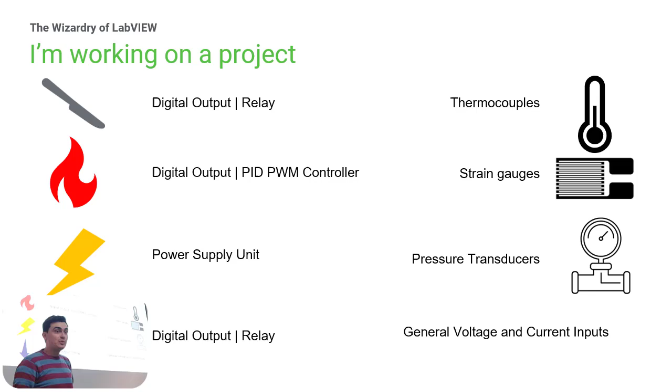But it's not just about blowing up this device under test. We also need to get some data to characterize what happens to that DUT. So I have a range of thermocouples, strain gauges, general DIO, AIO. And this is all very straightforward. Just the hardware for this. You can use everyone's favorite configuration editor. And because I'm quite experienced at all of this, I knew that this is going to work. And I guess this is the first marvel that I want to talk about when it comes to using the NI ecosystem and LabVIEW.

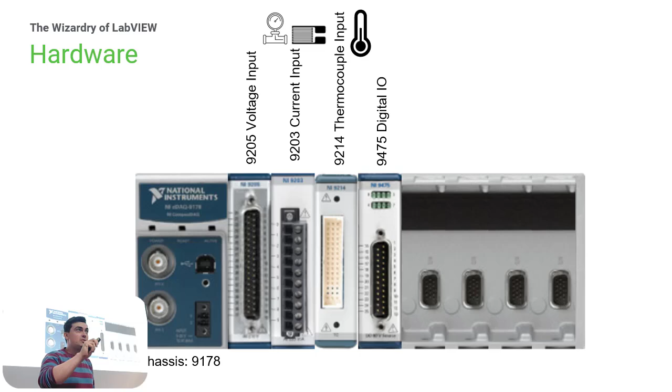I know that I can buy this equipment in the ballpark range of 3,000 to 5,000-ish. I think that's in dollars. And it's going to work out of the box. It's going to be more performant than I need it to be. This project will just run on Windows. But to go more specifically into this marvel, I'll talk about this DIO card. Probably the most basic card on there. It can either be on or off.

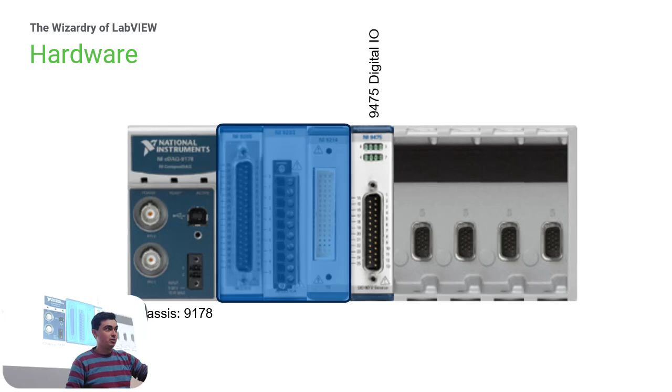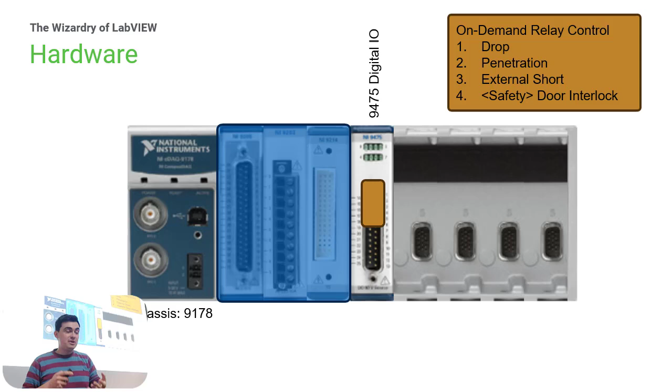But I need various I/O channels to drop the device, to penetrate a nail through the cell, do external shorts, surge, and I need other on-demand I/O for interlocks in the system. For temperature control, though, I also need to borrow a load of DIO for controlling heaters. I have 4 independent heaters on this DUT, and I need to be able to regulate the temperature around the DUT. DUT, device under test.

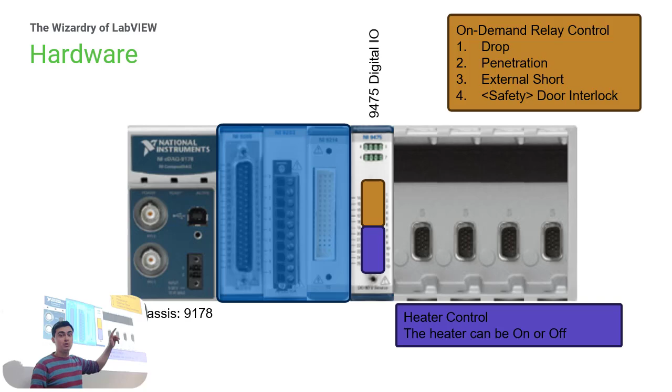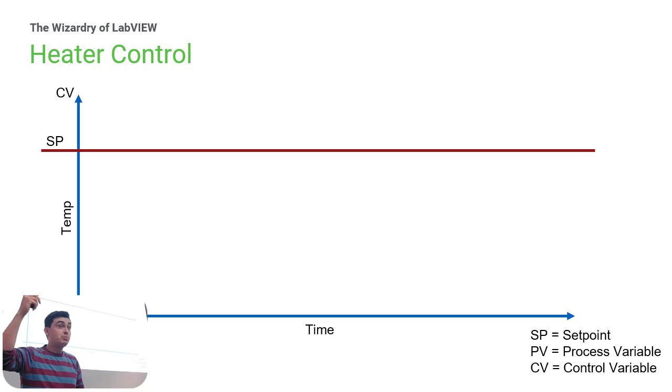That's fine, and this is our CV. What is CV? Control variable, out of the DIO. Now, that's all very well and good, but it doesn't look great, and when we're trying to characterize systems, we probably want more control than this. We want to make that tolerance as small as possible. And also, if you mess up your configuration for your tolerances,

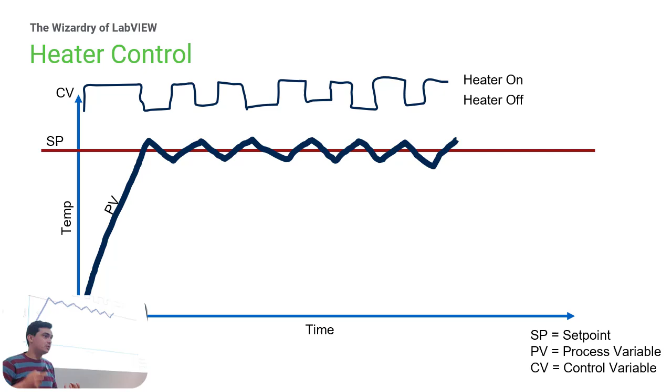what tends to happen with a bang-bang control circuit like this is you have massive overshoots. Even though you've told your heater to turn off, that heater is still very hot. So that heater is going to continue to increase the temperature of your DUT, and then the same thing happens in reverse. You told the heater to turn on here, but actually your DUT is getting cooler and cooler because of the ramp rate of warming up your heater, and basically your DUT is a heat sink. So we don't want that.

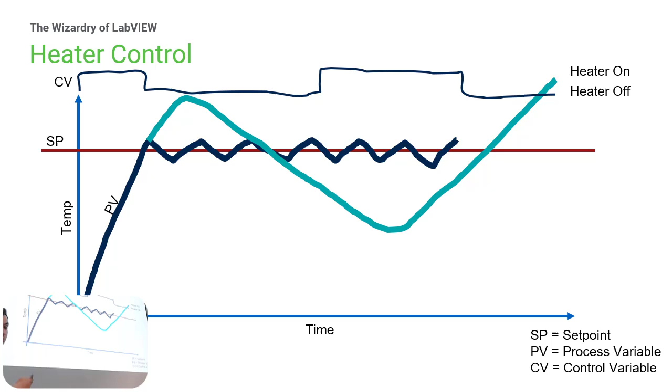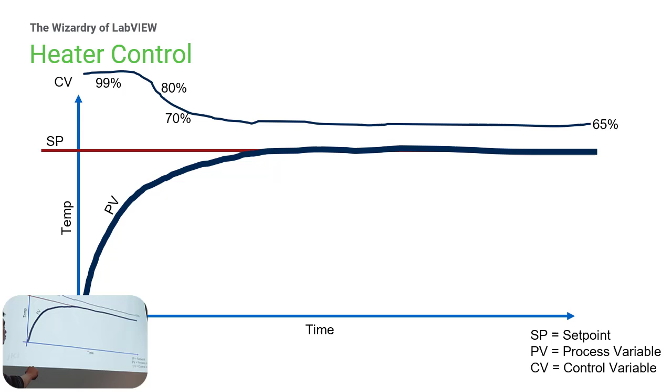Instead, we want something that looks like this, where we can start thinking about our heater not as an on-off, true-false heater, but something that we can control on an analog scale. I want this heater to be 75% on. And then by adjusting our control variable, we can create a nice curve on our process variable, the true temperature reading of our duct. And we're smart here.

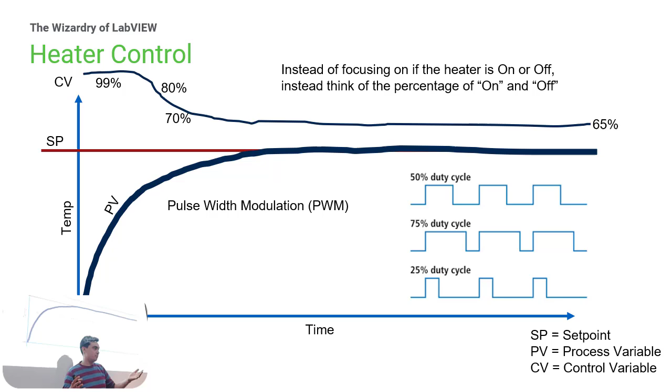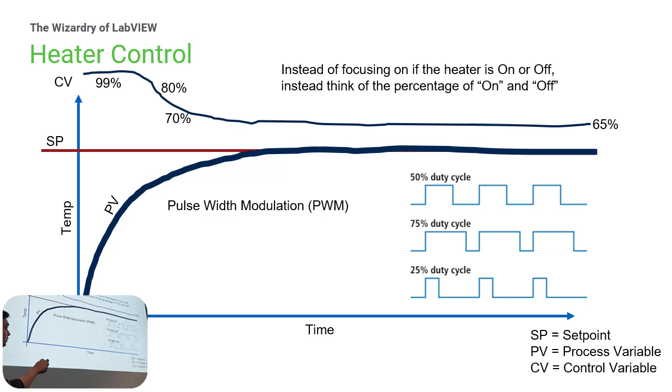You know that we're going with pulse width modulation for this, where we can play around with the duty cycle of the percentage of on time versus off time for our frequency. So all of this to say, I needed a way of implementing PWM with the hardware I already had. Now, when I got to this stage in the project, I was thinking, yeah, that's fine. This card, I'm sure it has counters. So I looked at the data sheet, nothing.

I saw that this card could go up to maybe 20 megahertz sample rate, but nothing about counters until I had to look at the data sheet of the chassis itself. And then I realised, bloody hell, there's 4 counters on the chassis, which I can then route through to the DIO. And if you're unfamiliar with what a counter is, it effectively lets us monitor frequencies, whether that's frequency generation or frequency monitoring.

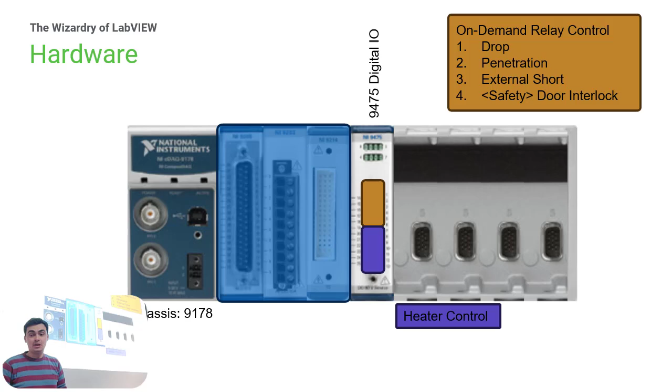So I read through the data sheet of the chassis, because typically I work with PXI backplanes, so I was unfamiliar with what a cDAQ chassis backplane had to offer. And I saw, right, it has 4 counters, and those 4 counters I can filter through to my DIO as if that DIO card had those counters inbuilt. The API was absolutely no different. And so yeah, this saved the day.

So I guess adding on to the previous hardware wonder of LabVIEW, this was a wonderful moment for me, realizing I've got myself out of a hole. And I could implement a really nice control system. Now, that control system in LabVIEW, in G, looks something like this. I can't show the actual customer code on here, but effectively we have a set point. This is going to be a user-defined or a test-defined parameter.

We have the process variable. This is a thermocouple reading near the heater. And then our control variable, this is controlling one of the counters I showed you on the chassis. And then we have our PID controller. Who here is familiar with PID controllers and closed-loop controllers in general? Okay, most of you are nodding.

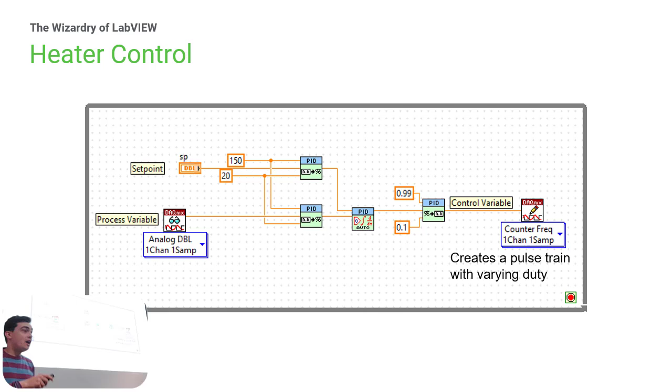And so the output here is going to be a number between 0 and 100, where 100% duty cycle would be on, and 0% would be off, 50% would be your standard square wave.

I'm using these functions here, here, and here to convert from real-life engineering units into a scale between 0 and 100. You don't have to have these here. You can enter into this function your ranges, but I prefer to scale everything to a percentage. It makes maths easier. So yeah, my mind works exactly like this.

G-code in general is a wonder in LabVIEW. It gives me the ability to think of a problem. Then I'm very dyslexic, so I will, in my mind, just whilst I'm having a coffee, just maybe close my eyes and think through the solution via a graph in my mind, exploring different avenues until I get this solution I'm pretty sure will work, but I find it difficult to explain that solution to other people.

And so I always end up just sketching it. In LabVIEW, you don't need to sketch it, you can just code it. And so this graph maps to how I think about problems.

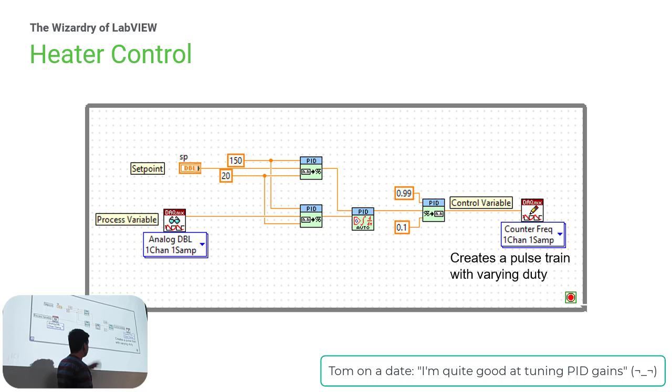Another great wonder. Now, humble brag, I'm quite good at tuning PID control systems, but out of the box in LabVIEW, I don't know if it's limited to LabVIEW Pro or LabVIEW Base, but the PID functions come with auto-tuning capabilities. So I will ship the system to a customer having tuned it, and I'm pretty confident in it.

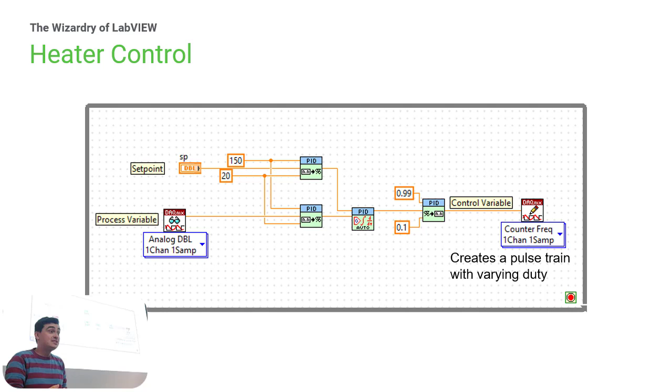But if they want to fine-tune it a bit more, you can enter a true Boolean into here, and then, hey presto, there's an auto-tuning wizard. And so I can ship that to the customer, basically no effort on my part, but it's improved their experience of my product. There are loads and loads of things in LabVIEW like this, which elevate your customer's experience. Another great wonder.

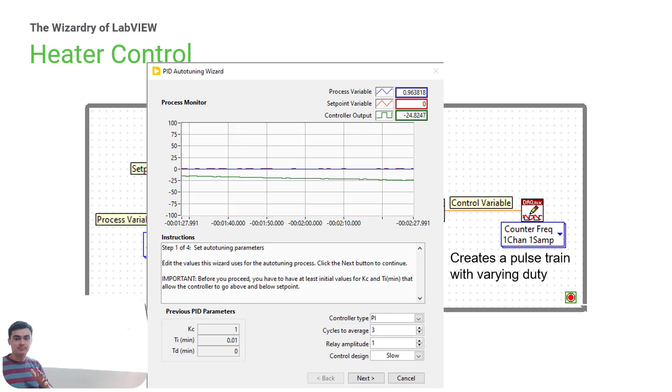Okay, so going back to this slide, we've talked about how the DIO is on-demand I/O. Then at the bottom here is going to be hardware timed. With the PWM signal I'm sending to the temperature control loop, that will be a standard 10 Hz signal, which I'm then adjusting the duty of. And because it's hardware timed, I know it's going to be pretty damn close to 10 Hz. It's not going to be controlled by Windows.

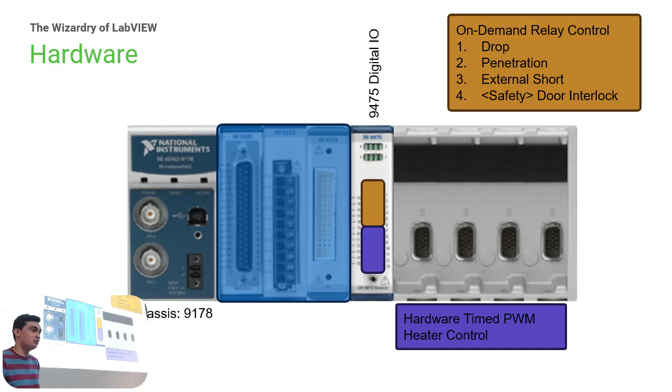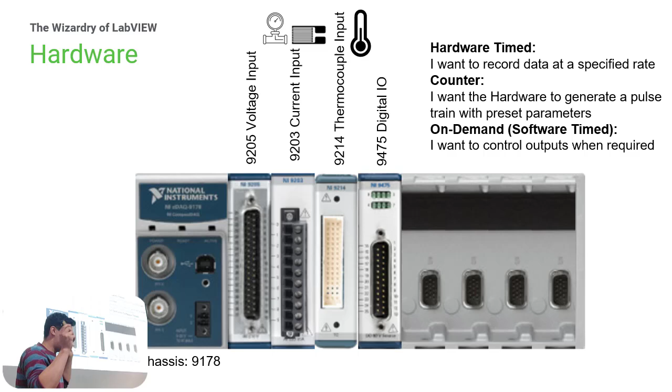What are we going to talk about? Yeah, so hardware timed, counter timed, and on demand or software. Now, everything that you see here can be controlled by exactly one API, DAQmx. Again, all feeding into how great it is to use NI hardware in LabVIEW. Basically these 10 or so functions will do all of your tasks.

Now, all of the code is going to basically look like this, except it isn't. Let me explain. All of the DAQmx code, you can create a channel, configure it, read or write, stop, clean up. And even if you don't have the hardware attached, you can simulate your hardware in MAX. So again, this is great.

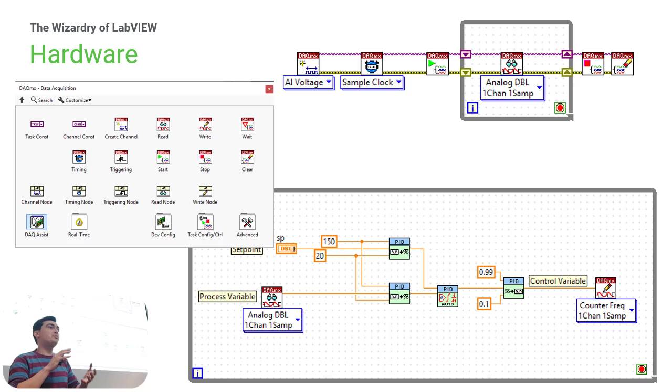Except for this particular project, I really wanted to be able to simulate devices to a higher degree than what MAX gives us. MAX being the Measurement and Automation Explorer, which allows you to configure the hardware. And so I basically took each of these functions and wrapped them into a special function which allowed me to swap the behavior depending on whether the hardware was connected or disconnected. And we call those special functions dynamic dispatch.

If you're familiar with object-oriented programming, great, you'll know what I'm talking about. If you're not familiar with it, it's a way of changing functionality based on conditions. Think of it as a fancy case structure. The way that object-oriented programming and dynamic dispatch is implemented in LabVIEW is another great wonder.

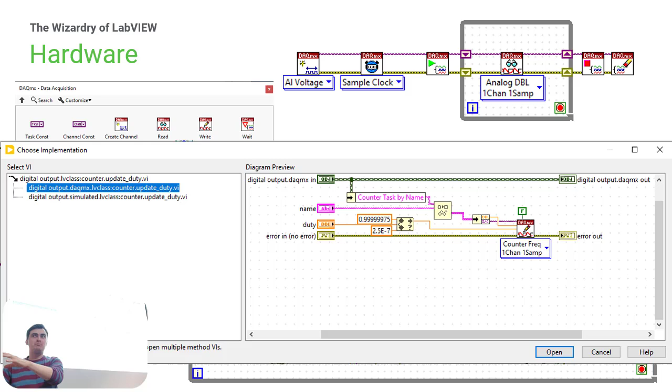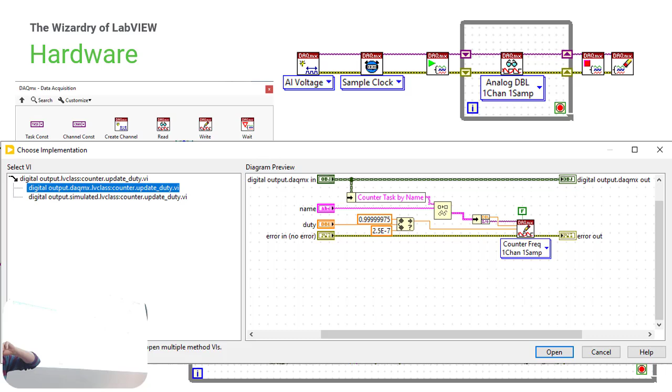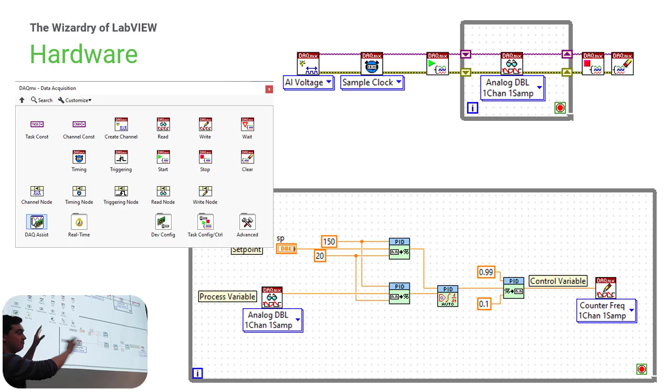But the way that this works, I think is really cool. You can double click on one of these functions and see the code in each implementation. Okay, enough OOP. I've lost most of you, so I'll move on. Yeah, so we have this generic code thing. Who can tell me, how do we do multi-threaded programming in LabVIEW?

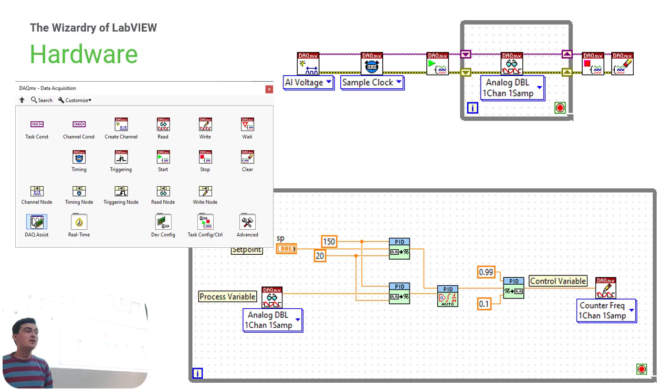Stick it on a block diagram, don't tie it together. Perfect. So I can copy and paste these. So I have 1, 2, 3, 4, 5, 6 loops on this block diagram. Great. I have 6 threads that are all going to execute. Do that in C++.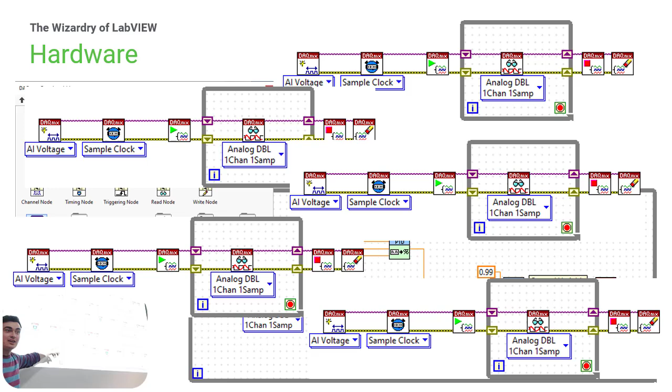You know, I know a bit of C++. I know enough Rust in order to implement this, but I can do this in 15 minutes. The time it would take me to implement it in another language would be colossal. The cost for the customer of buying a LabVIEW license, whether that's LabVIEW Plus, the full suite of NI hardware, well, my development time, to be frank, far outweighs the cost of the hardware and the licenses.

So if I was made to use free software and a free programming language and cheaper hardware, the customer would pay 10 times the amount of programming hours. So yeah, multi-threading in LabVIEW, amazing.

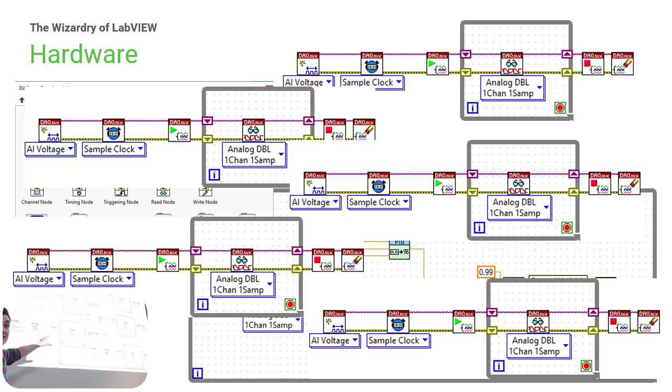Who here was at GDevCon, the last one? 1, 2, 3, okay. In my last GDevCon talk, I spoke about the LabVIEW compiler stack. I won't go into it here, but another wonder: programming in LabVIEW is super quick. I don't think LabVIEW gets the recognition it should. As a programming language, LabVIEW is fast. LabVIEW can have a seat at the same table as programming languages like Rust.

And it's down to the low-level virtual machine. It's in fact the same compiler technology that Rust uses. It's a different stack, don't get me wrong, but fundamentally the same technology. To put it in context, Python isn't in the same room as the table. Python is orders of magnitude slower. Okay, side note, that's great. LabVIEW's awesome. Next, NI VISA.

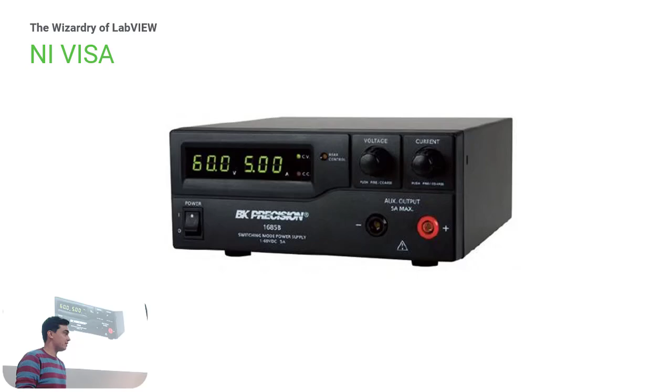One of my pieces of hardware, a PSU, that's not NI. This is the process I went through to learn, since it's not DAQmx, how do I program it? Well, I Googled it. I got the model number, the programming manual, there's a PDF. Let's scroll down, okay, so I need to send this function, I get this reply. All right, so from that datasheet, I took a screenshot of things like the baud rate, the serial setup stuff, and the message.

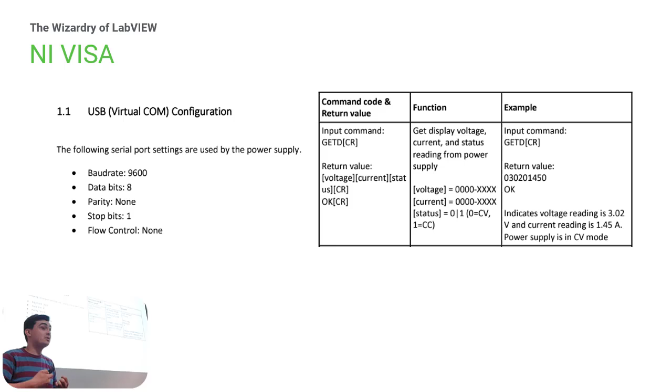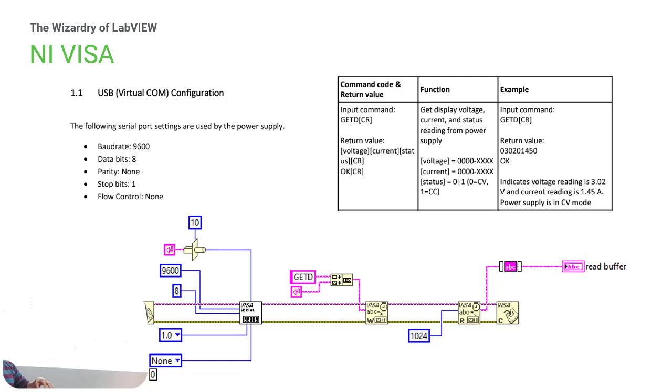Using VISA, I think, again, VISA is underrated in LabVIEW. The amount of effort it would take to keep up with a standard like VISA is colossal. I wrote this on the train up from London this morning. It didn't take me the full train journey, but the point is, this maybe took 5 minutes whilst on a shaky train, and that's going to work. Unit test it, but it's going to work.

Small trick here, slight tangent, again, this is awesome. If you've specified your termination character and enabled your termination character, this function is going to wait until it's received a number of bytes or until that termination character is received. I see lots of people write the function, put a stall data flow of 200 milliseconds, and then use a read bytes at port, read. You don't need to do that.

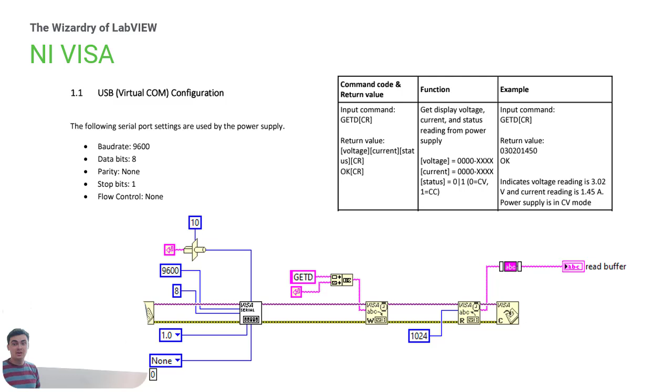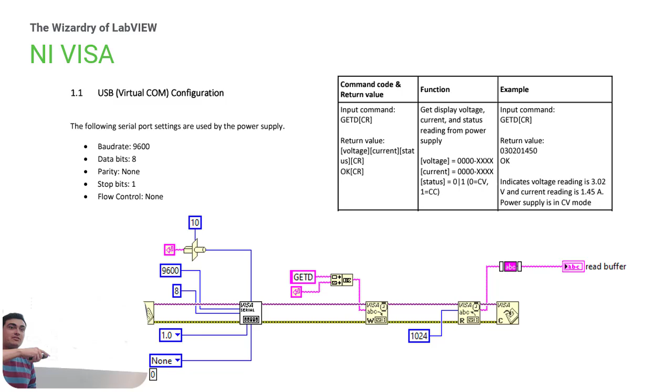Specify termination characters. Also use VISA events. They're quite cool. I've used those a lot. This technique doesn't really work if your termination character is more than 1 character long. So again, NI VISA, this is awesome. You should use it. It's great. But you only need to use this if someone else hasn't already produced a package.

So this is great. What's not so great is saved versions in LabVIEW. Every year a new version comes out and you're like, do I upgrade all of my packages but then restrict other people from using them if they're using 2020, but I've updated everything to 2022? We're already at 2024. Q1 is released, right? Yeah. I'm playing around with the Q3 beta on my laptop, and so where everyone has 2020, that's starting to get a bit old, even though everyone loves it.

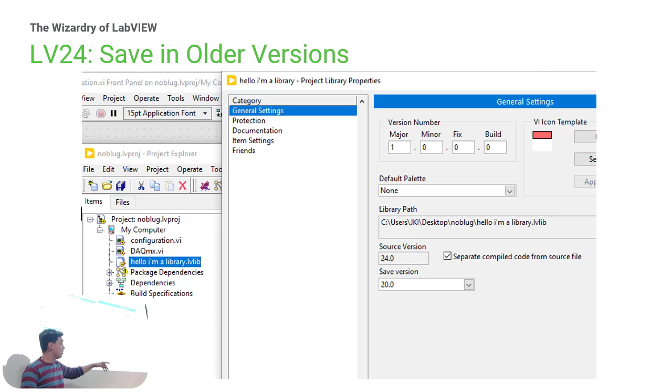another great wonder in LabVIEW Q3, it was actually released in Q1 if you knew what you were doing, but it's more public now in Q3: if you're creating a library that you want to distribute, right click, go to properties, general settings, you can have a new save version. You can use LabVIEW 2024 and Zoom and all the other great features, but your source code can be saved in 2020. So now Fiona and Abigail can program in different versions of LabVIEW, but they both get saved in 2020.

But LabVIEW needs to be configured to have different packages installed. Let's say Fiona built this package based on the OpenG variant library. They used that because it was a shortcut. It had some new controls they wanted to use. Well, to contribute to an open source project, every developer's computer needs to have all of the dependencies installed.